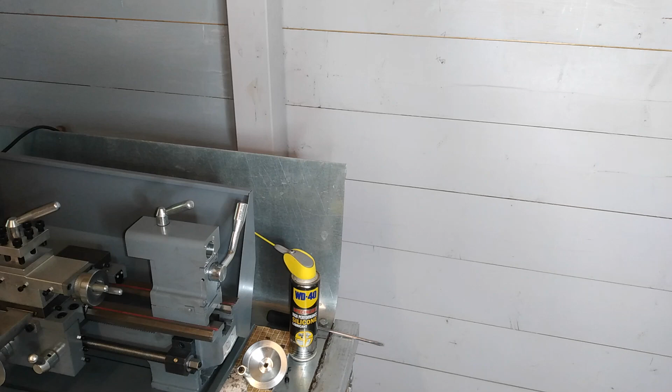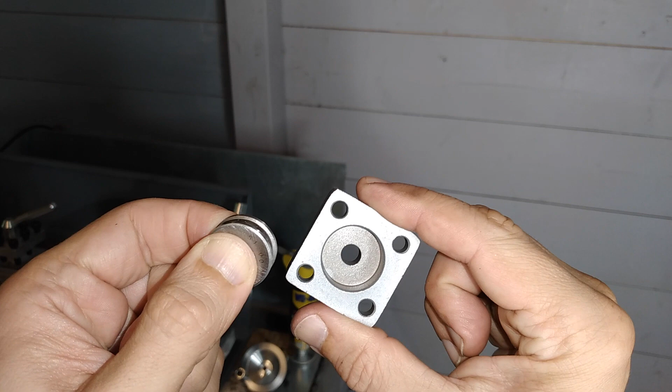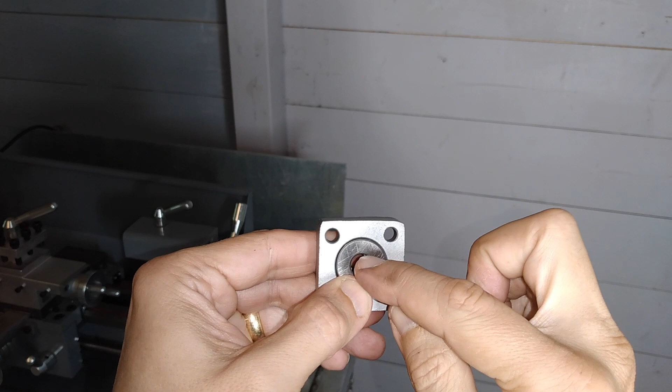I'm now going to reassemble the tail stock. This little ball bearing situation I'm not particularly happy about, and that goes in here. For the moment I'm going to leave it as is because I don't have a replacement, so I'll just oil it and put it back into its little component part, which barely fit. But I'm going to see about getting an actual unit that fits in here with these dimensions. So I'm going to measure that and see if I can just buy one solid unit instead of these three little pieces, and we'll see if that works. But for the meantime, I'll leave this as is.

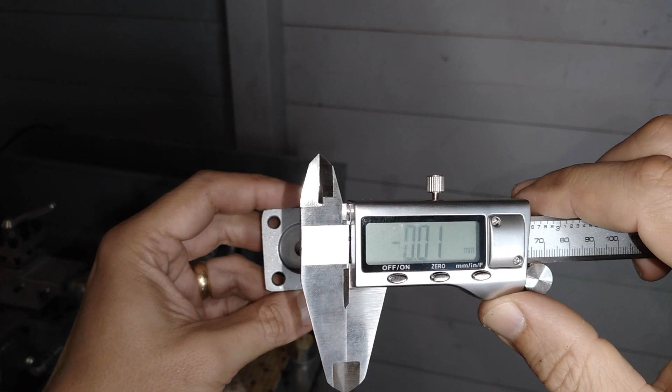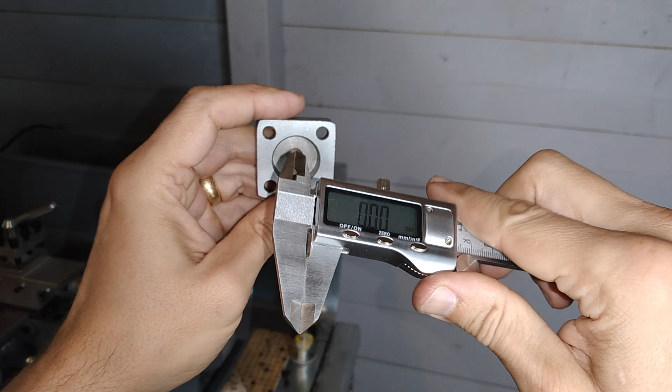I know this is basic, but I thought I'd show you the actual measuring of this. When I squeeze it together, it actually says minus 0.01, so I'm going to zero it. What you want is the inside dimension of this. We can do it a couple of ways. You can see that there is 23.68 millimeters. Really, this is the way to do it correctly, and you can see the actual internal measurement is 24.05 because there's a bit of chamfering.

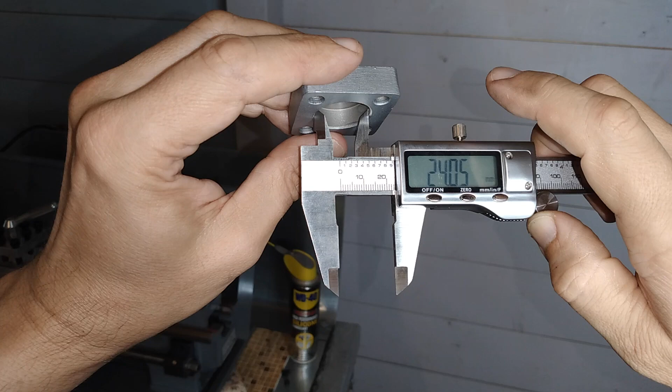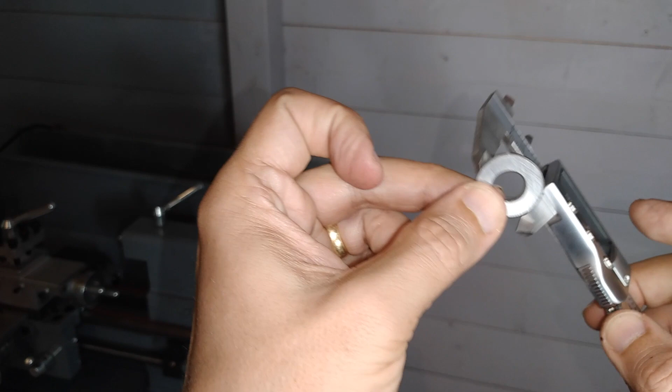To double check, we can take one of these and measure it like that. And you can see the measurement there, almost 24.

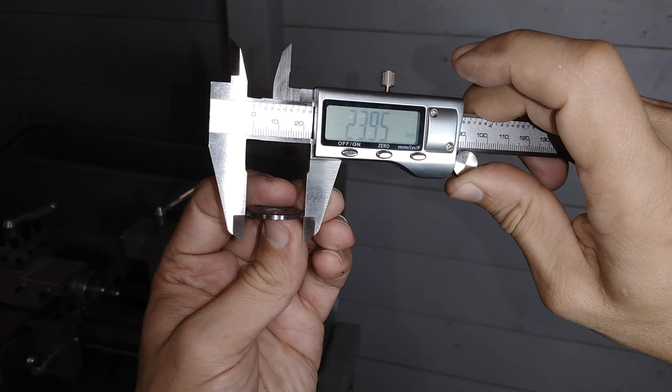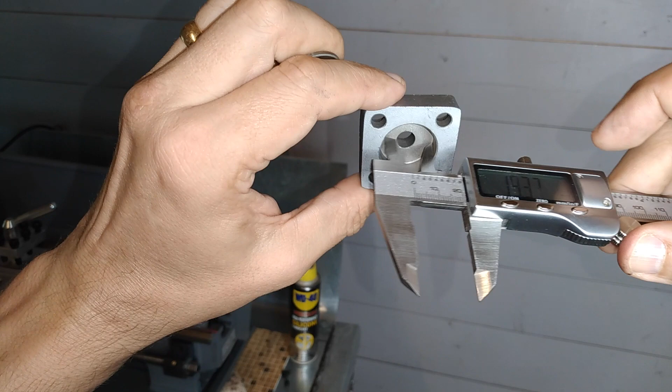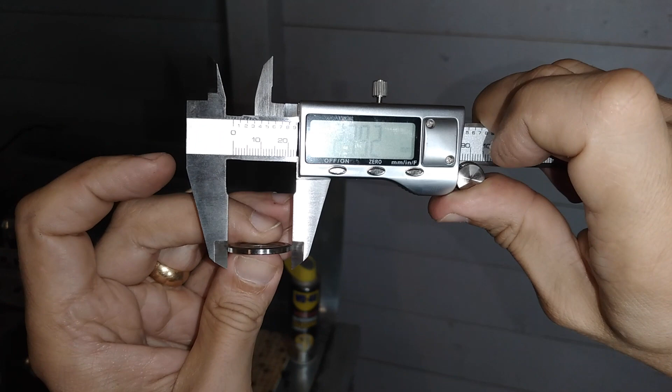From 2405 to 2395, you're talking about a tenth of a millimeter, which is, to show you again, 24.28, 24.29 at the limit if I push it. So 24.29, and you have to try and get it exactly in the middle. So 23.92, so the most that it is 0.08 plus 29, so you're looking at about a third of a millimeter play.

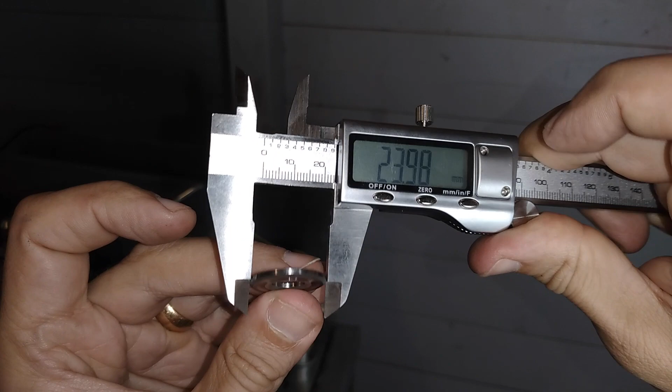That's basically what I'm going to be looking for. To double check, I can also measure the other: 23.98. And you also want this dimension, the internal dimension of where the bolt is going to go through, so you want to make sure you've got that one as well. 10.16, which should be the same as this one.

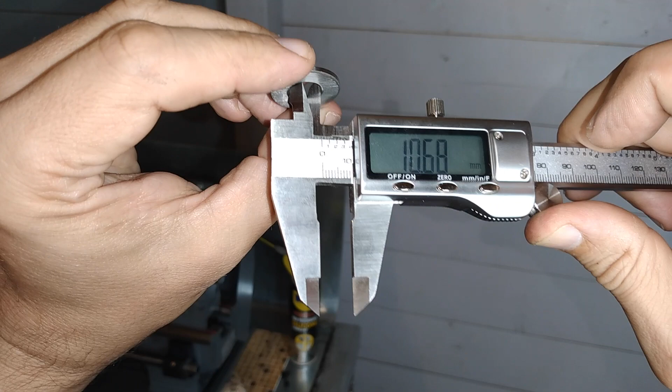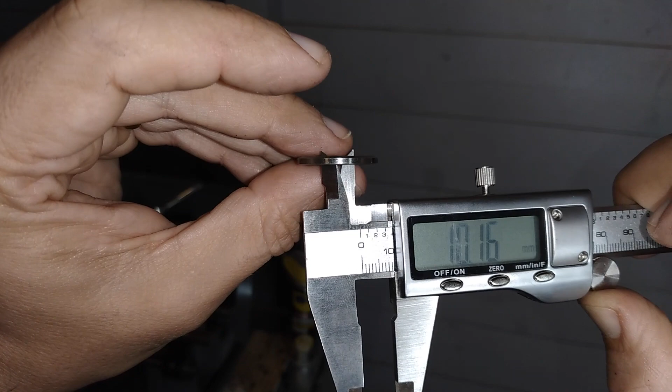As you can see, either this caliper is not perfect, which is possible - it wasn't the most expensive one, but it should be doing its job. So that's 10.7, and this one is - well, we've got almost half a millimeter of difference in the diameter of these openings. But anyway, there you go. I'm going to write all those things down so that when I try and purchase the ball bearing as one unit, hopefully I'll get it right.

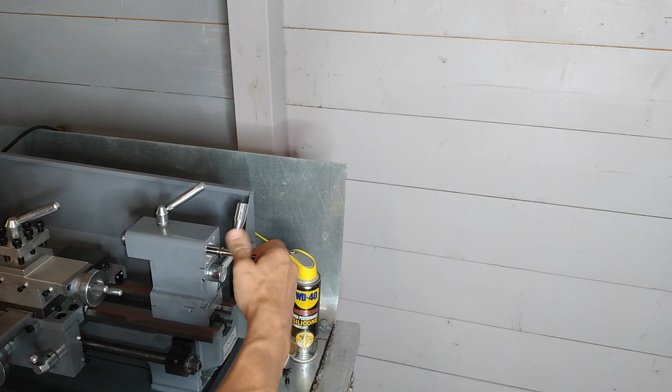And here's just the reassembly of the tail stock bits. I'm just going to try and keep it in such a way that you can see what I'm doing, and I'll probably fast forward it because it's not all that interesting.

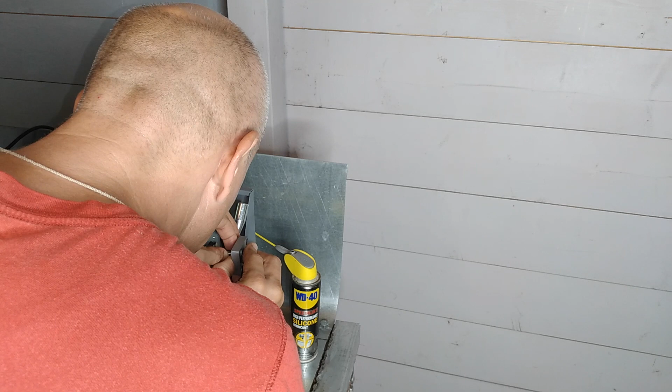Notice that this goes the other way around - it goes counterclockwise to lock, which is different. It lines up pretty well, but just make sure.

Let's see if any of the other orientation is better, so I'm just taking it out and turning it. I think the original was the best. Yeah, this one's also pretty good. Yeah, I'd say this is probably the best orientation, so that's what I'll go for.

Unfortunately my little screws got bumped, so I'm not sure that they're exactly the same ones going into the same holes, but we'll see.

Yes, and there's the usual problem, which is that these little bolts don't always fit perfectly, and that does disturb me, because as far as I'm concerned, the bolts should have an absolutely correct measurement for Allen keys. Otherwise you're going to end up stripping them, and that's no good.

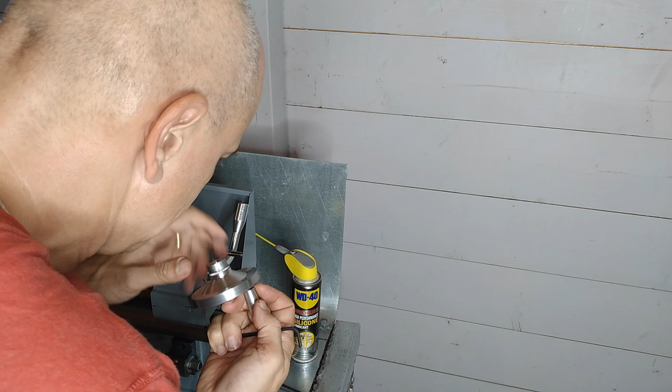Oh wait, not quite. Where is that little piece? There it is. This little guy is very important, and needs to go in here. That is the little key that fits there.

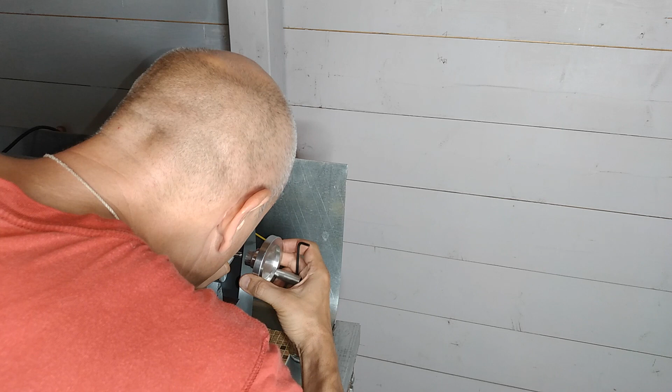The interesting part is that this is sitting towards the bottom now. It's going to be a little bit more complicated to get it in there. And could be that I have it the wrong way around, because although it shouldn't, it is slightly angled, so one side of it is slightly... yeah, I think that is the orientation. One side of it is not perfectly rectangular, put it that way. So it doesn't quite fit the way you want it to.

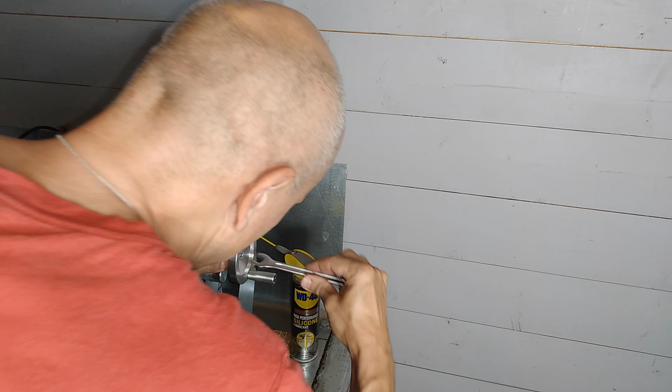There we go, and we put this bolt back on. Again, this bolt is not great, I mean the nut is not great, but I've got better nuts than this one, so I can always change it. For now, just gonna tighten it a bit.

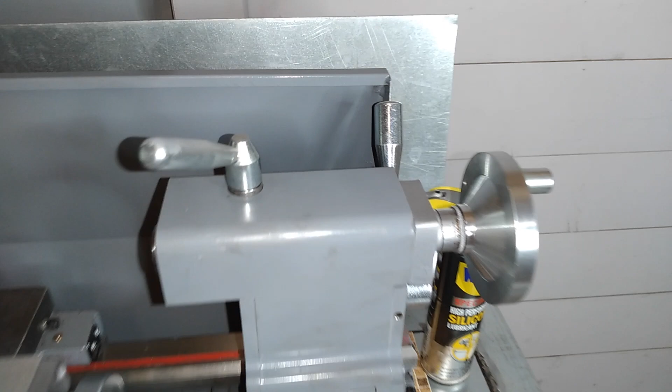Okay, so we do have a problem here, I think I better show you. Hold on to your hats, because this will be... there we go. So you see the scale there, which if we assume that's 0, now look what happens. As I turn this wheel, of course, that's slowly moving out, and it should be moving out at the rate of, let's see, there it is at the top, 1 revolution, and we've gone, okay, so we've got 1, 2, 3, 4, 5 lines, 1 revolution, 2 more lines.

So we've got, let's go the other way, just start from the beginning so you can see. So that's 1 line out, and if I do 1 full revolution, that's 1. 1 full revolution, that's 2. 1 full revolution, that's 3. That's what it should be.

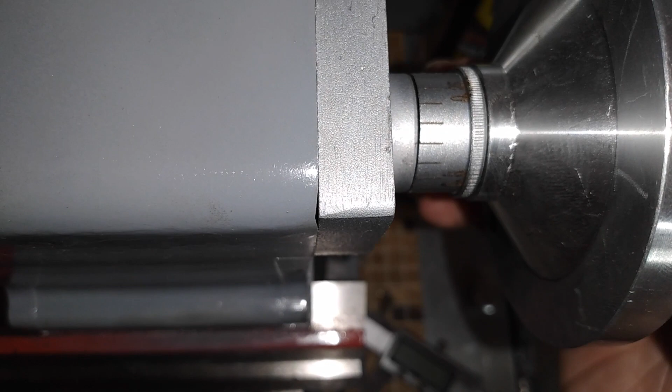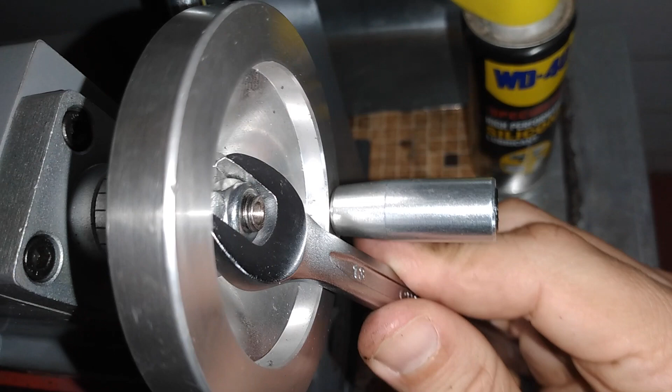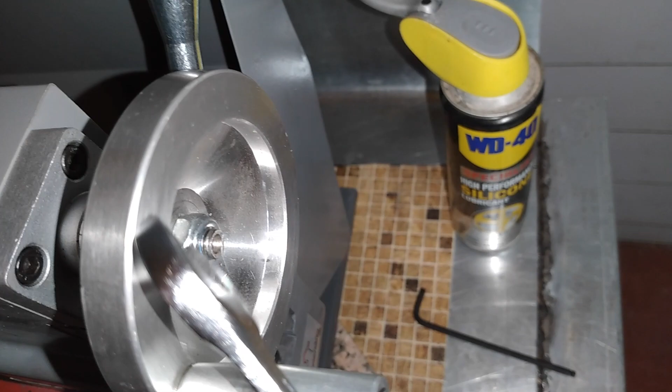But unfortunately, we've got a bit of play here, which means if I tighten the bolt here a bit more, then it all grinds to a halt. Let me show you. So if I tighten that a bit more, then this doesn't move at all. And if I loosen it, you know, it's still a bit stiff. If I loosen it too much, of course, then I lose the... this thing. And as soon as there's a bit of friction, this spins while the wheel is not moving.

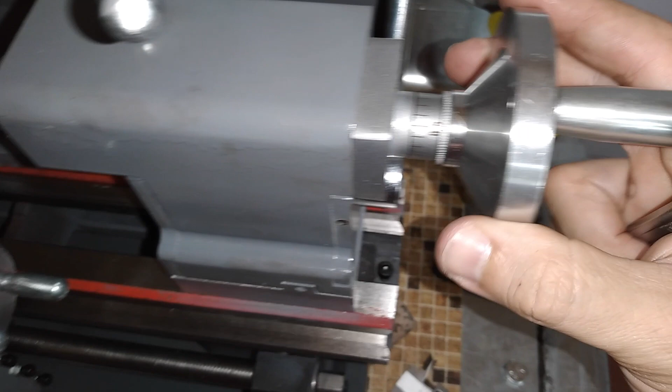So that's not ideal. Don't know how I'm going to fix that, but I assume part of the problem is that you've got that little spring in there. I'm not sure why that is in there, to be honest, because as far as I understand it, if you get this on a 0, this dial should pretty much be connected to that, but I'll see. And you know, the important thing really is the measurements on here, which you can see anyways. That's in inches and that's in millimeters. So you know, you can see the rate regardless of how many turns. You can sort of see what's happening over there, but yeah, probably not ideal.

Anyway, this works a lot better. It's locked it in, and when you lock that in... sorry, I didn't show you. So when you lock this in properly now, this doesn't really go anywhere. That play that there is, is just the bolt. I mean, you can force it, I suppose, but this really, if you tighten it, that shouldn't go anywhere. The fact that it still goes back and forth like that, I don't know, not great. I'll have to figure out how to fix that.

And of course the handle is always those little jobbies, so gotta tighten that a bit. But the tailstock has, I think, measurably improved. You'll notice a nice bit of paint there as usual. That's my first pass on cleaning it and whatever. I need to have the burring tools and that to come back on it. But that's the tailstock assembly done for a first pass. Next thing is gonna be this monstrosity, and we'll see how far I get with that.